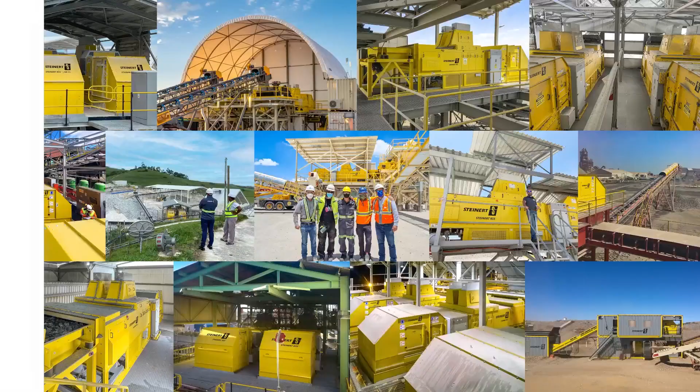So from STEINERT's perspective, we have over 100 global installations spread across the world. As you can see from these images, this gives you an idea of what this looks like. Important also to point out, from an operational perspective, is that not just environmentally but operations-wise, sensor-based sorting on the dry basis, when compared to other wet processes such as dense medium separation, has an OPEX advantage as well.

If we make comparisons per ton of ore processed required, we're looking at a difference between $0.60 to $0.80 on the sensor-based sorting dry process side, and $2 to $2.50 per ton of processed ore on the DMS side. So there is definitely not just an environmental benefit, but also an operations benefit.

All right, yeah, always helpful to have such a picture that gives a good idea. So the technology that we talk about is sensor-based sorting, SBS if you want to keep it short, and it can be applied in different ways on mining sites. Can you give us an overview of this?

Yeah, absolutely. So from our perspective, we are driving 5 ways of applying sensor-based sorting. And these 5 ways are, as we've discussed, run-of-mine pre-concentration. This is alleviating the downstream, looking from an upstream coarse gangue rejection perspective.

Then we've got final concentration, which is a very interesting topic. Haulage efficiency has to do with reducing the amount of material that has to be hauled from pit or underground to the actual plant.

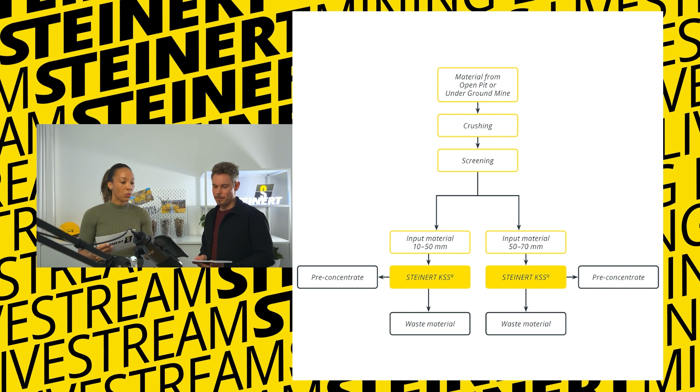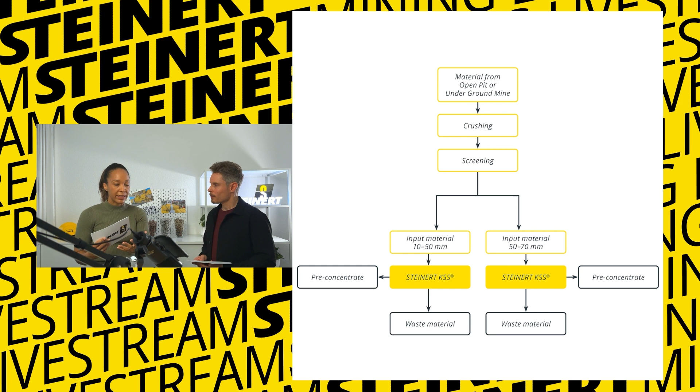And we have the coarse gangue rejection or waste material that can then be stockpiled and managed, because then we know the composition and the grade of that. So it also provides for stockpile management or waste management, and also grade control on the side of pre-concentration, because we know what we're putting out of the system. It's easier to understand.

This is important to point out: from where we would insert this kind of technology within the circuit would be somewhere between the secondary and tertiary crushing circuit. So there's already, from that point of view, alleviation on energy consumption.

All right, and can you please point out and underline once again the benefits of run-of-mine pre-concentration, so to have it really in mind for our audience?

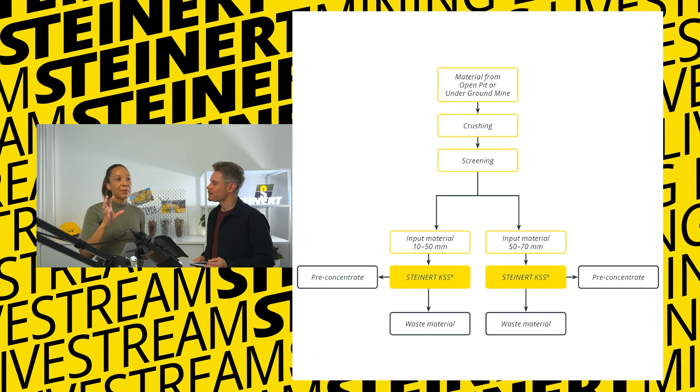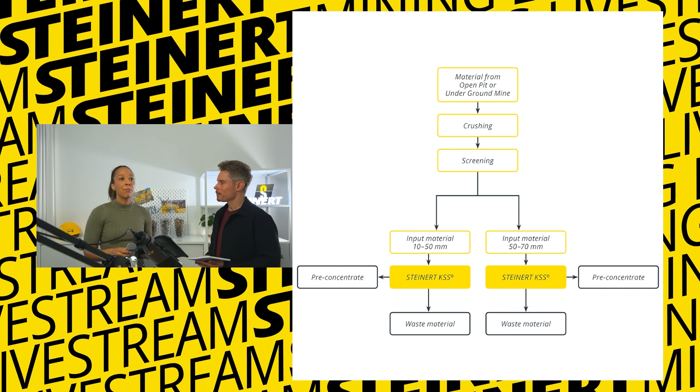Absolutely. So numbers were discussed earlier on, and maybe going back to those, from an energy consumption perspective, we're looking at somewhere around 30 to 34% reduction in energy consumption by placing the sensor sorters as I've described. And as a result of that, in terms of water usage reduction, we're looking at a 40 to 44% reduction in water usage, simply because we're able to process dry.

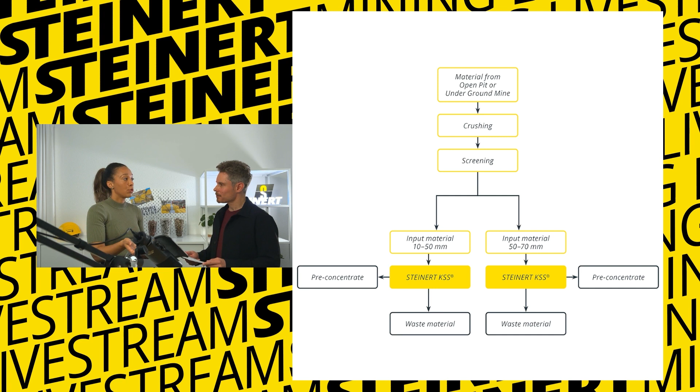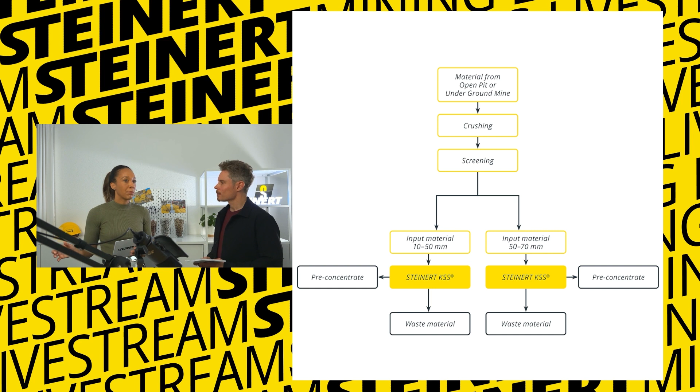And one aspect that's really important and under-discussed within the industry is fine or ultra-fine waste generation. This is slimes that are problematic for the flotation plant downstream, problematic for the recoveries downstream. In that case, we can see significant reductions, about 50 to 57%. So that is really helpful as well.

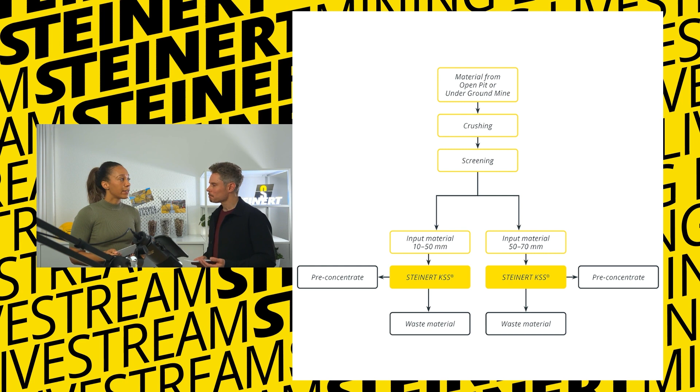Got lots of information, benefits for the first application. Can you also take us into the second application?

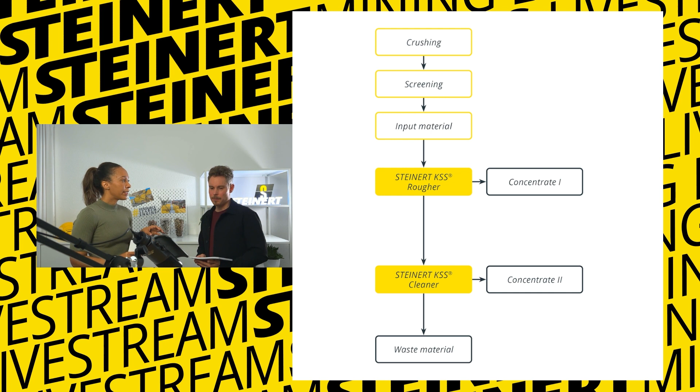Absolutely. So the second application, for me, is what we call final concentration, and we have another simplified flow sheet to look at. Now, the idea of final concentration is nothing new. Its application in the diamond processing industry has been in place for quite a lot of time. The reasons behind it are slightly different, having to do with security reasons, but nonetheless it's proven technology and a proven way of processing.

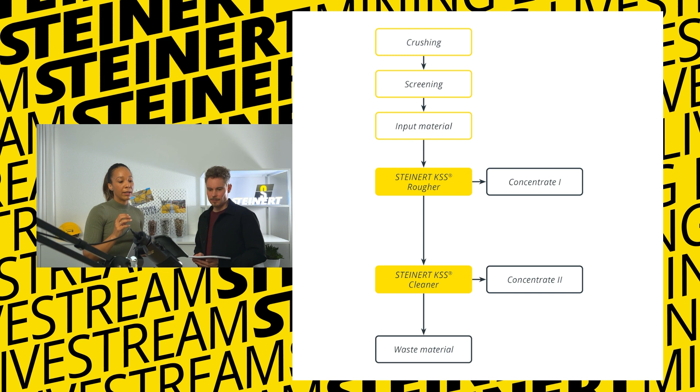And this thinking has then been adapted slightly differently in our case here. So what we see here is a magnetite hematite ore body as an example. In this instance, what we are trying to do, or what we have already done in a number of installations, is generate a concentrate of lump, so a magnetite concentrate in excess of 63% iron.

And why that's important is that lump product can then be utilized for direct reduction. And we know, through several discussions, that a lot of great interest has been in finding ways to make steel and iron a lot more green. So green iron, green steel - and this is the perfect way to generate a raw material for exactly that.

Understanding that not all ore bodies and not all mineralogies allow for it - liberation plays a key role. However, we see that there are certain areas and certain ore bodies that certainly allow for that, and we need to take a look at those opportunities. So that's what we've done.

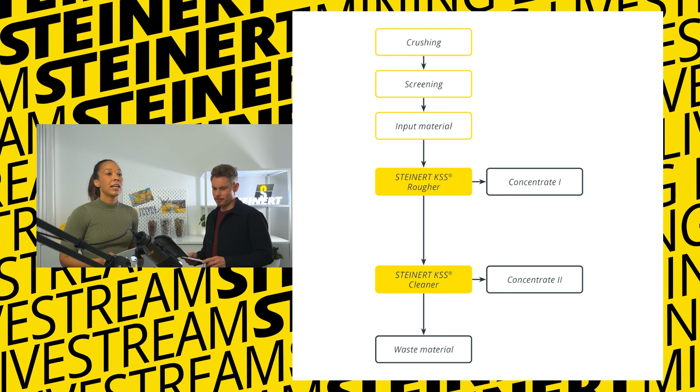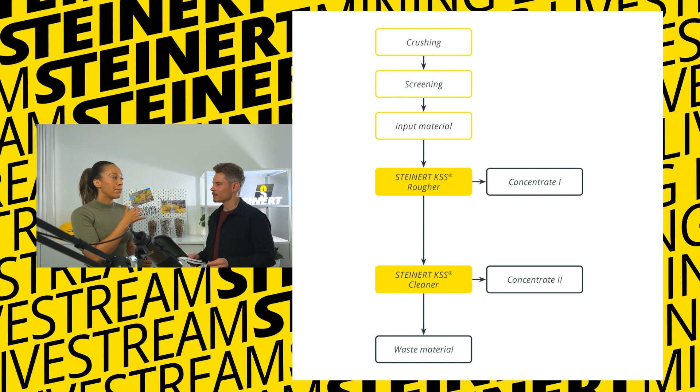In the second instance, we would have a second concentrate generated, and maybe this is where the focus is then on hematite, which can then be processed through the processing plant. Whereas the waste, provided that it is fairly barren, or at least so low grade that it doesn't make economic sense, can then be stockpiled or put together as backfill. So those are the options, and that's what we have put in, tried and tested.

And what I already see is, while you're giving this presentation, questions are coming in the chat, so that's always good to know, very good to see. Something we'll come back to in just a couple of minutes. Before that, I do have some questions to ask.

Would you share with us how the system actually works? So what you just started to explain.

Absolutely. So again, we have a visual - today we're using a lot of visuals. What we, as a company, have reflected on are the requirements, changing ore bodies, and complex sorting tasks. We've taken on the decision to take a multi-sensor approach to sorting. It's not an exclusive approach, but it's one that we've seen work very well for a number of reasons.

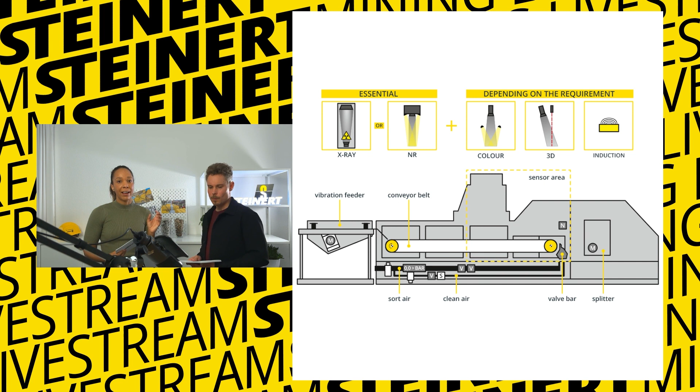So what you see in this instance is a belt-fed system with a vibrating feeder on, let's call it, the tail end of the system, where material is initially introduced into the sorter.

The responsibility of the vibrating feeder is to accelerate the material forward in a monolayer onto the belt. In this instance, we're talking about particle sorting, so every single particle is analyzed individually, and a decision is made on the basis of that particle. That material is then transported through a sensor area, and we can adapt various different sensors in various different configurations together, so we can have one of the essential sensors.

In this instance, we've given the examples of X-ray transmission as well as near-infrared. One of the essential sensors can then be coupled together with one or several of the secondary sensors that you see there. In this instance, we have color, laser 3D recognition, and induction or electromagnetic conductivity. Those can then be coupled into the sensor area.

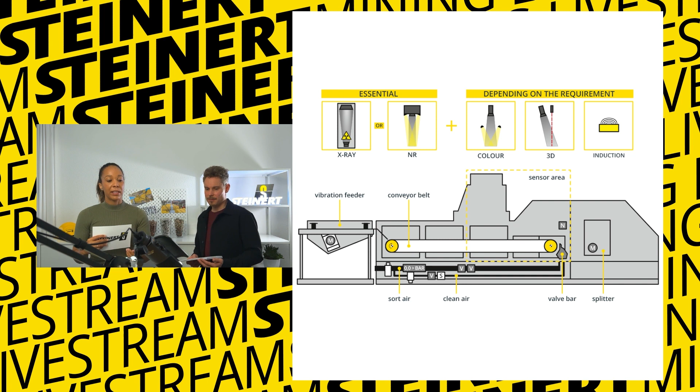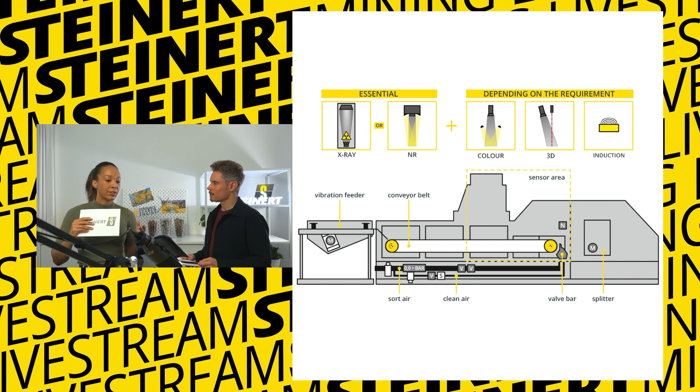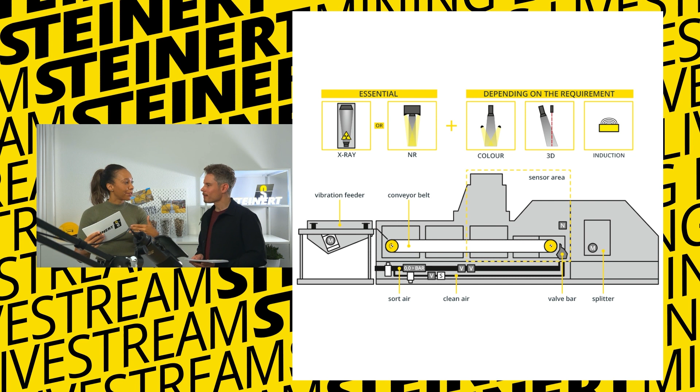Once that discrimination has been made, the particle has been recognized, and the decision has been made to eject it out of the stream, that material is then accelerated over an area where we have got a valve bar. This is where the pneumatic valves use compressed air to expel those particles into the second compartment, which you see there behind the splitter, and the rest of the material falls into the stream. So this explains a little bit what the process looks like, what the machine looks like, and the process idea behind it.

And in the meantime, questions are popping up. Always a good sign. Let's focus on the sensors once again.

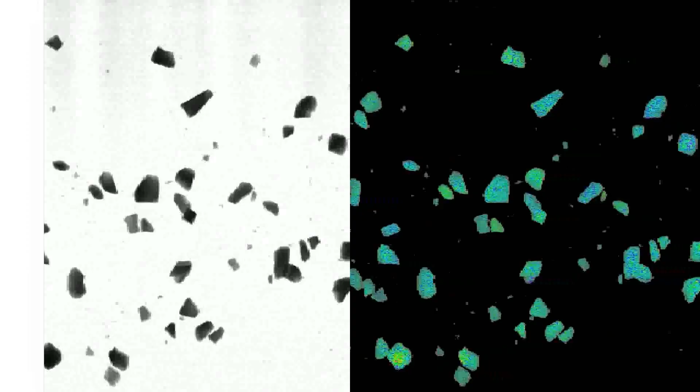So are those sensors individually responsible for characterizing the material's individual responses? Yes. It's important to point out, I know I emphasize the multi-sensor approach, but it's possible to look at single individual sensors and single individual responses and make a decision just based on that single response. I think it's something we'll have a look at in the next video.

This is a video that essentially represents material that has been scanned on a belt, and these are XRT images that you see on the left-hand side in grayscale form. You see dark images or dark particles and slightly lighter gray particles, and that is just an unclassified raw image of material on a belt.

Darker particles represent atomically denser material, and lighter particles represent atomically lighter material. What then happens is within the algorithm or the classification tree, we decide on taking those images and making various comparisons. That then is on our end, we classify those images and make a decision.

As you can see, there are some images on the right-hand side, the classified images, where you can start to see different color ramps or colorizations, and that is an indication of what the content of the material is. It also sometimes gives an indication of the structure, so that gives us more information, and we can make more decisions on that basis. So here you can see how mono or single sensors can definitely be utilized.

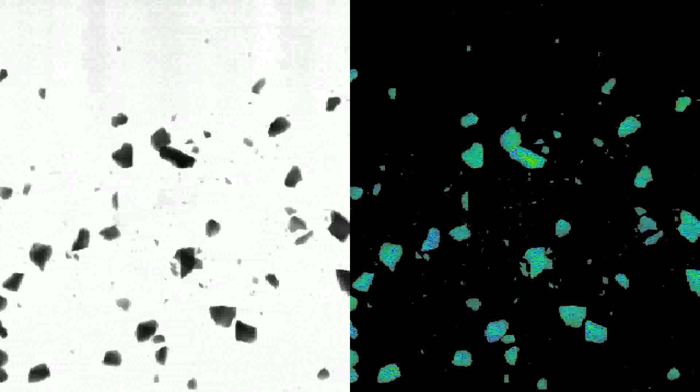Thanks to Paul for playing the video. It's always a teamwork here, here at STEINERT. And I know that you did your homework, Lerato. Can you please share one or some concrete examples with us?

It's hard to choose one, of course, but I think one that comes to mind that really stands out is a client that chose to adopt the technology quite early on, but also came back and thought about ways they can see the benefit and utilize the technology for various different tasks on site. So they have several sorters in series as well as in parallel.

This allows them to create chromite as a metallurgical grade chromite for their use and also for export. But at the same time, they're able to make a secondary product, commercially sellable chromite, at a slightly lower grade. This adaptation and configuration within the plant is unique, and this is something we'll see in a video shortly.

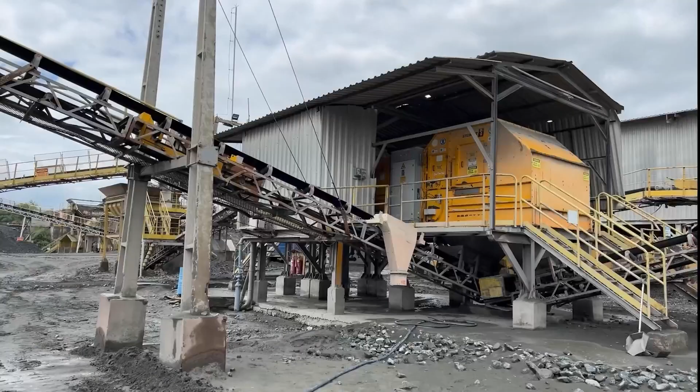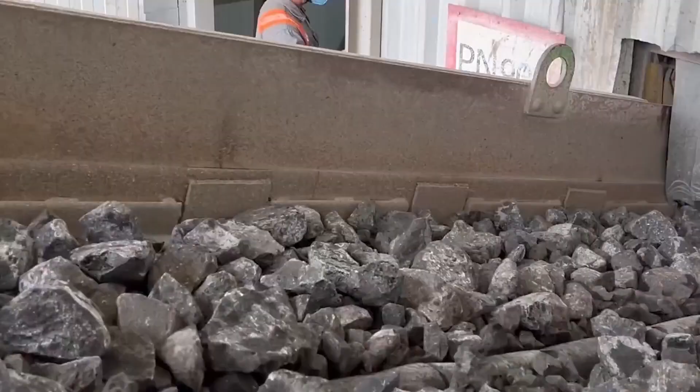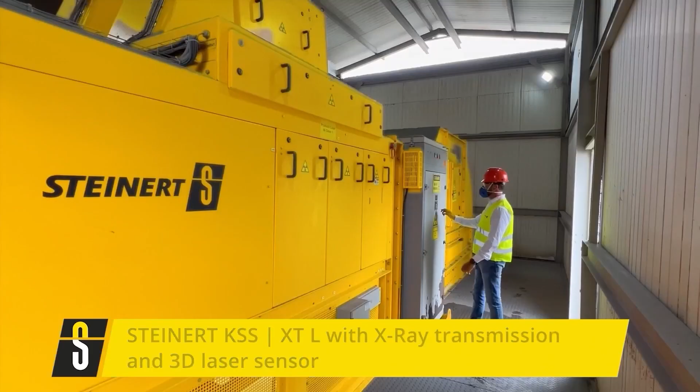Here we see a chromite mine, one of the first installations using X-ray transmission sorting, with over 10 years of pre-concentrating run-of-mine. The client expanded the installation to include 2 further sorters using STEINERT KSS. The STEINERT KSS is fed with particles 1 to 4 inches, approximately 25 to 100 millimeters. The control panel you see here makes it easy and user-friendly to switch between various recipes, depending on the grade and requirements. This customer is able to upgrade their chromite ore to 37%.

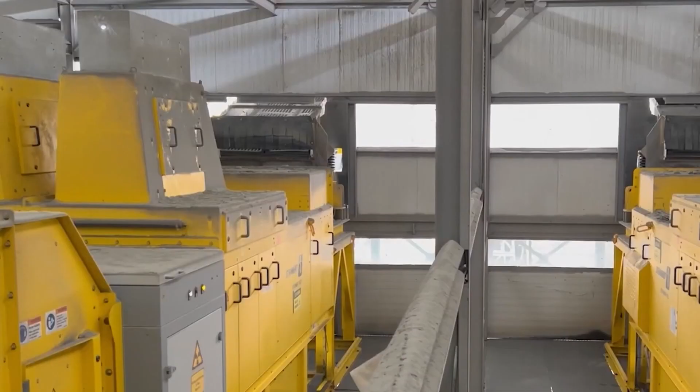The latest installation is a stockpile retreatment installation. All these expansions show that the customer trusts the technology and values the benefit thereof.